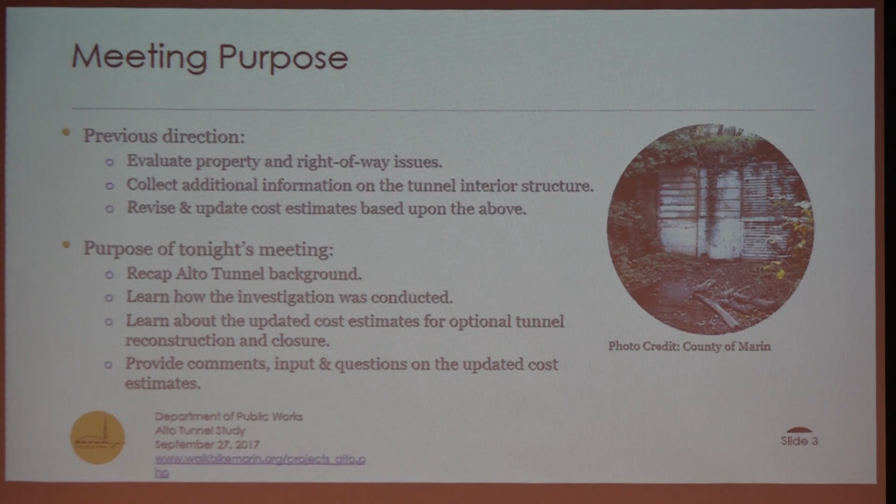So I just want to quickly go over what the previous direction was to study. After the Mill Valley to Corte Madera study, we had some questions that came out of that about the Alto tunnel corridor. We wanted to further evaluate the property and rights-of-way issues. We weren't quite certain about what those were, so we wanted to further study those, and then also to investigate the interior condition of the tunnel, because we hadn't been in there in a long time. We thought that those 2 things might affect the cost estimates that were identified in the Mill Valley to Corte Madera corridor study.

So that's the purpose of tonight, to review those final cost estimate updates based on that new information that we've just learned over the last several years, and make sure that we got it right.

So I want to introduce Victoria Eisen. She's going to come up and do a brief talk about what tonight's meeting is really about and what our question and answer session is going to be like.

Okay, so one more historic question. How many of you were at the meeting that we had in January that kicked off this whole study?

Okay, so a lot of you know how we did it last time. It seemed to work really well, so we're going to do it again. But first, I just want to clarify, like we did last time, that the Alto tunnel study is an investigation of the inside of the tunnel, like Carrie said, and its physical condition. It's not a pathway feasibility study. So tonight, we're going to report on what we found inside the tunnel and how it affects the cost estimates for doing various things with the tunnel, but we're not discussing the pathway and whether or not we're going to do a pathway. That's a decision to be made with the information that came out of this study.

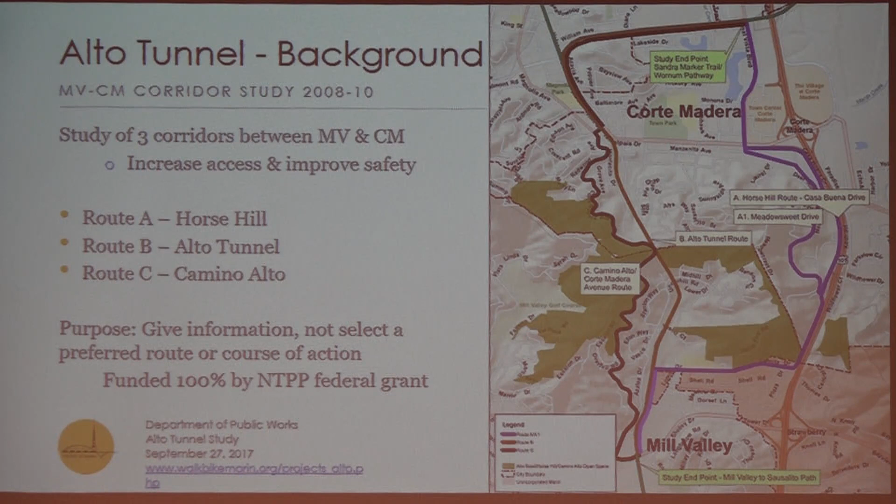This is just a recap, letting you know about the corridor study, which took a look at 3 separate corridors between Mill Valley and Corte Madera. The purpose of that corridor study was to evaluate and give information about those 3 corridors, not to compare them with each other, or to select a preferred route or course of action, but to provide information on possible improvements along those corridors. That study, along with this one, as Craig mentioned earlier, was 100% funded by non-motorized transportation pilot program funds.

This just gives you a little bit of facts about the Alto tunnel. It's just over 2,100 feet long, 16 feet wide. The cost estimates in the 2010 study identified for the tunnel segment only, 40 to 50 million, and for the entire route, about 48 to 60 million for all of the improvements combined. That compares to the Cal Park Tunnel between San Rafael and Larkspur, which is 1,100 feet long.

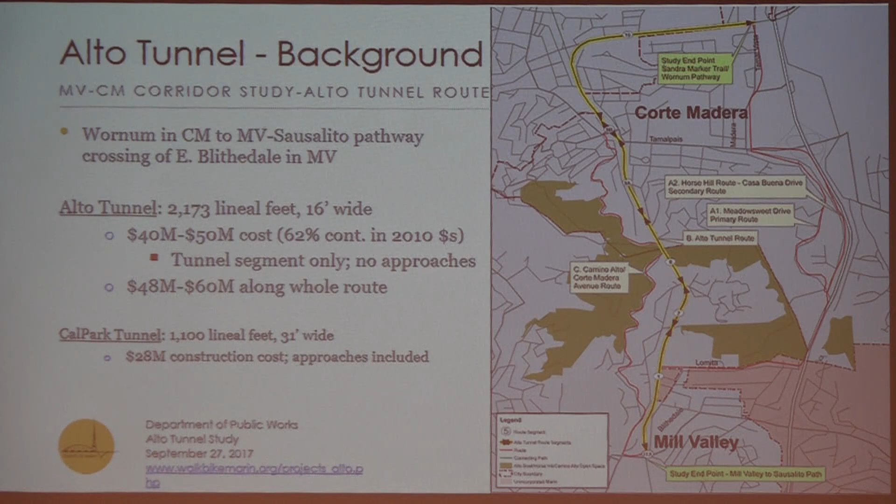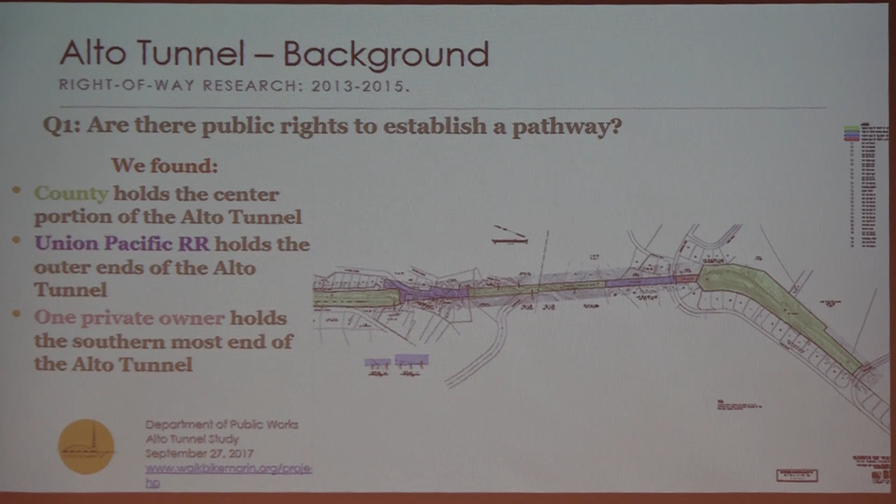Back in November 2015, we reported out to the community on our research about the right-of-way rights, about whether or not we had the rights to establish a public pathway. We found that the county holds the center, Union Pacific still holds the outer sides of the tunnel, and then there is one private owner on the southern end. So with that information, we used it to update our cost estimates for right-of-way acquisition.

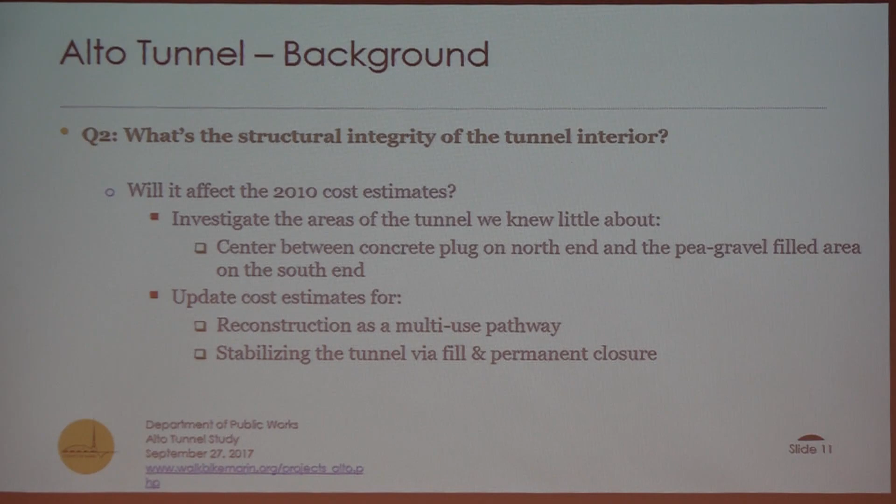So now we're going to get into the meat and potatoes of tonight's presentation, going on into answering the question about what the structural integrity of the tunnel interior is and whether or not it affected the 2010 cost estimates. We took a look in between the concrete plug on the north end of the tunnel and the pea gravel filled area on the south end, because we haven't been in that section of the tunnel in a really long time. There are other sections of the tunnel that we knew a little bit about, but that center section is the area we didn't know really anything about. So that's what we really needed to know in order to update those cost estimates, either for reconstruction as a pathway or for stabilizing and closing the tunnel, if at some point in the future that decision became necessary.

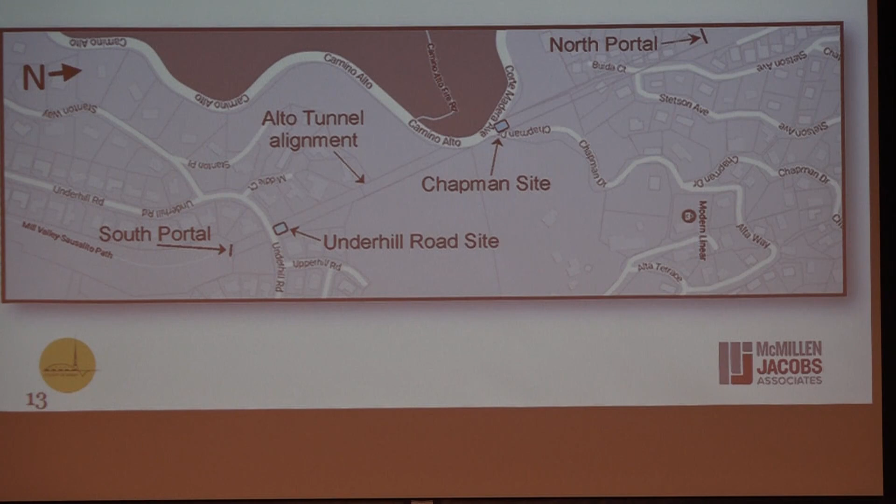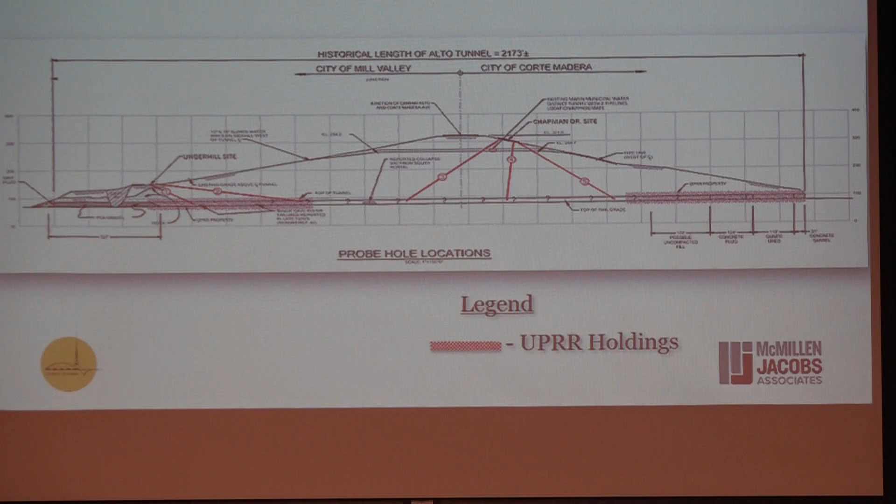We've talked about the south end of the tunnel. We had a collapse, now filled in with pea gravel, that occurred back in, I believe, 1981. This is the north end of the tunnel. We actually have a section here that's backfilled with a low-strength concrete material, 125 feet long.

So it's the interior of this tunnel that is currently inaccessible to manned entry. The purpose of this study was to investigate the interior of the tunnel.

What we did was, from the ground surface, we drilled 5 holes, 5-inch diameter, steel-cased holes, to intercept the tunnel. Once those holes were completed, we had a specialty subcontractor come out who performed laser scanning.

This was completed with a probe that we lowered down into the tunnel. It has an articulated head at the end of the probe, and it spins around as it shoots out a laser, and it pings back a response for a distance.

And it produces essentially a 3-dimensional point cloud that we can then gather the data from and produce a 3-dimensional image.

Other things to note here in the pink, this is UPRR property or holdings, and we have UPRR here at the north end as well.

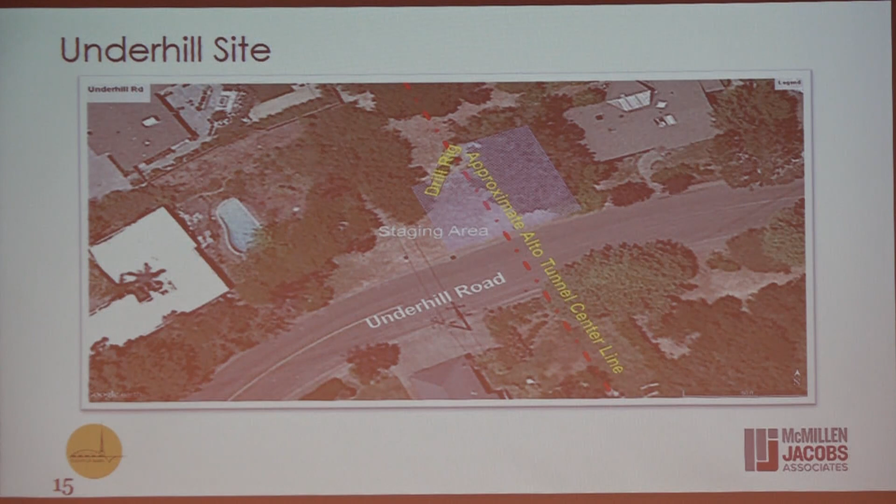This is the Underhill Road site at the south portal. This just shows where our drilling operation was staged.

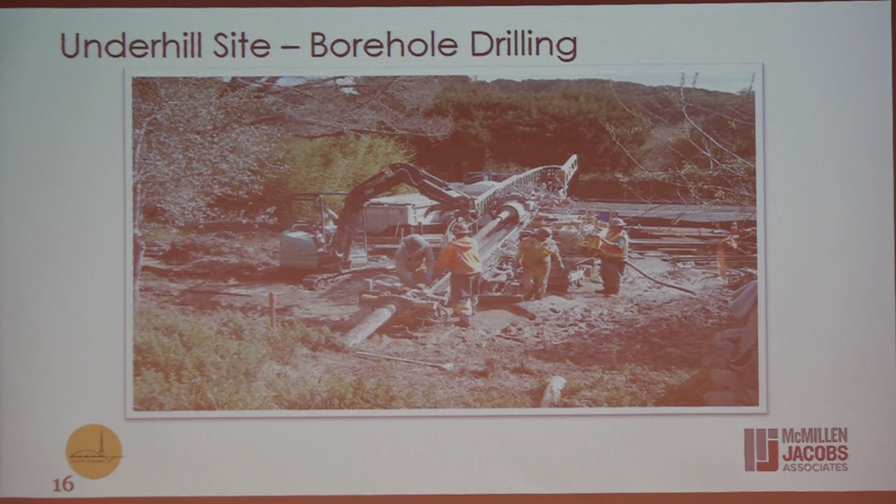This is a typical drilling operation. Recall this work took place during February and March. It was pretty rainy. We did a really good job of isolating the site and limiting erosion. This is the site when we were completed with drilling.

We actually covered each borehole location with an access box so we could come in later and do our scanning.

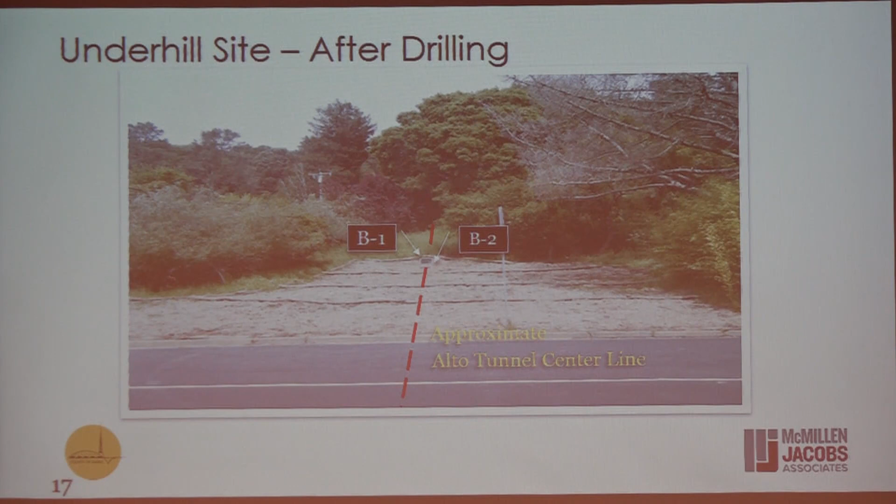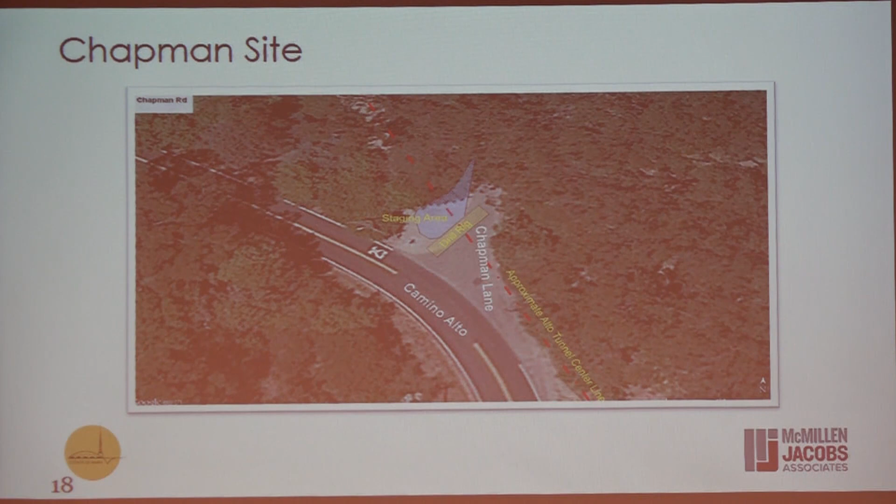This is the Chapman site. The tunnel is shown here in red coming through here. This site is right at the very top of Camino Alto. We actually took Chapman Lane for about 2 or 3 weeks as we drilled down. We had 3 locations that we drilled from here.

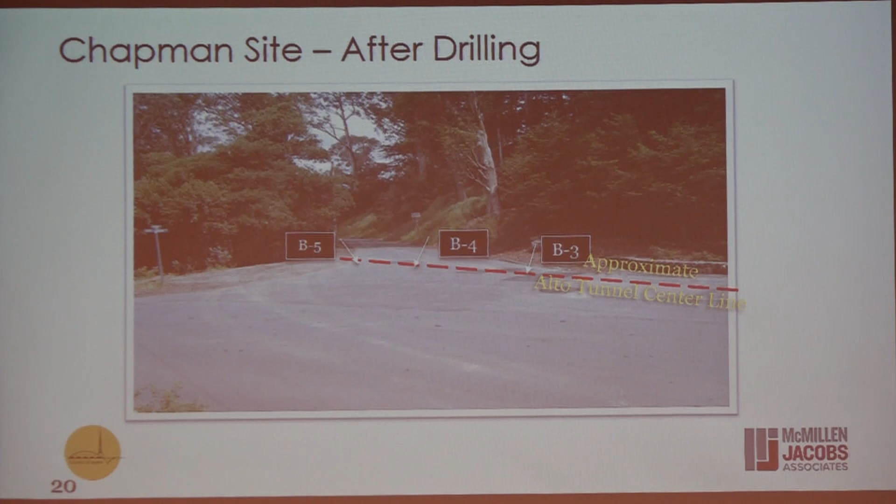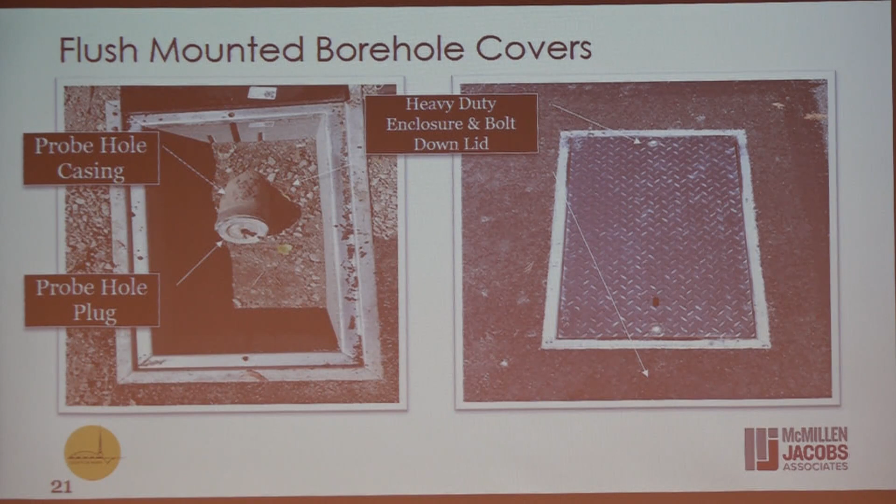This is one of the traffic rated boxes. This is what's inside the box, the steel casing and a cover on each casing.

Okay, so I'm going to quickly give you guys an overview of what we found first, and then I'll get into the details of what we actually saw in the slides to come.

But to summarize, boring B1, we hit collapsed material. Boring B2, we also hit collapsed material. Boring B3, collapsed material. Boring B4 was open, not collapsed.

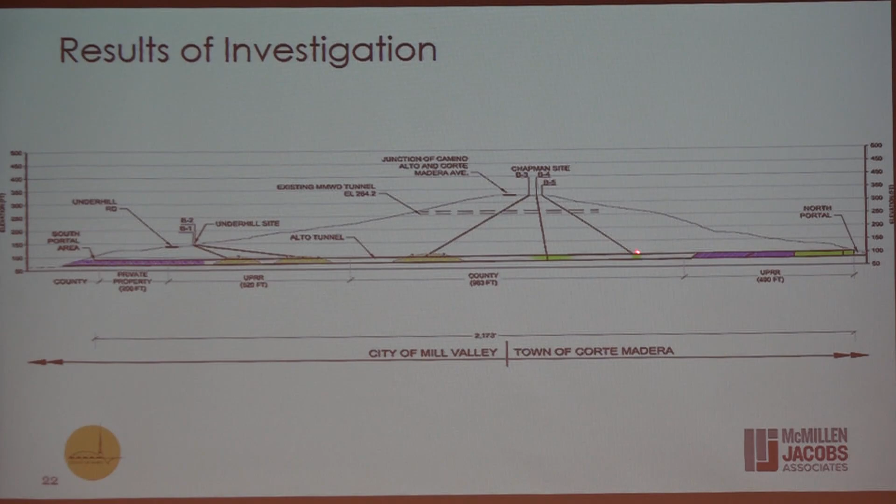Boring B5 was a little bit hard to determine what it was. I'll get to that later, but we found that it was open, not collapsed.

So to get into it, this is our first boring that we saw. After we completed the drilling of each boring, we sent down a GoPro video just so we could get an image of what we had inside the tunnel. When we were drilling, we weren't quite sure what we found.

We knew we were in the tunnel. The drilling operation uses air to push cuttings back up. We lost air circulation, meaning we'd hit a void. We definitely hit something different. This is what we found when we lowered the GoPro in.

The boring was where it needed to be, but we encountered rubble. For reference, this is 5 inches thick. This hole that you see here, that's actually where we advanced the drilling and the casing as far as we could.

We then retracted the casing a little bit to get this video. So that's the 5-inch casing hole that you see right there. It was collapsed rock. We found no void, and so we could not scan at this location.

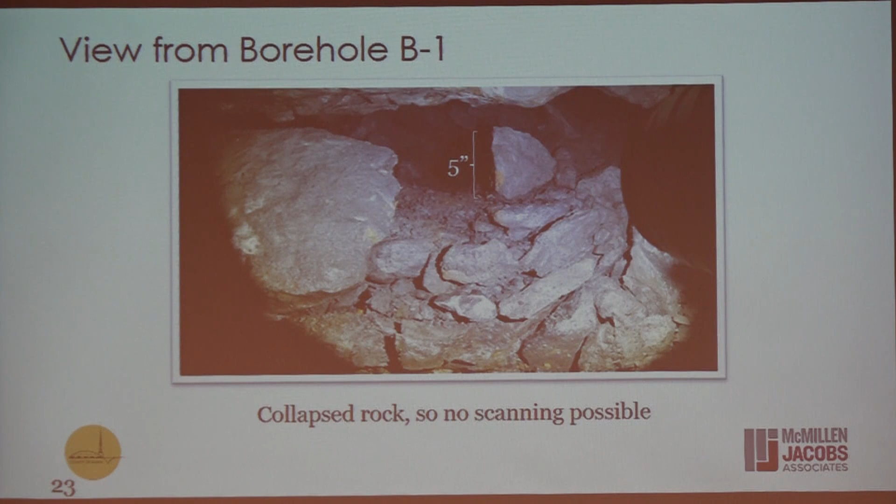Again, B2, kind of the same deal, although we couldn't advance the casing. So this is the steel casing that you see here. Again, rubble material that we terminated into.

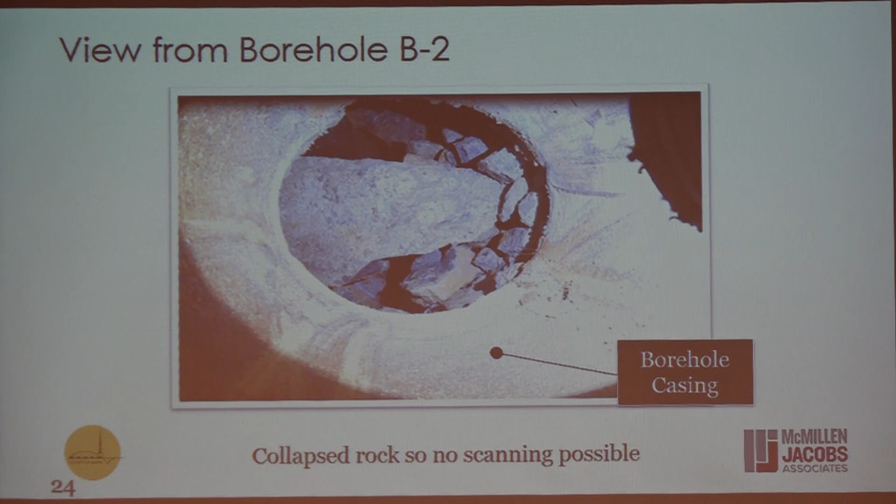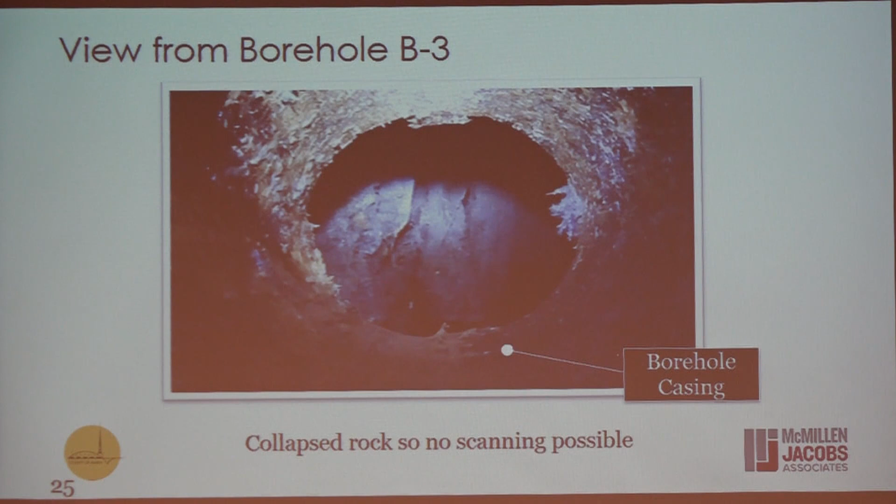Boring B3, again, here's our steel casing. It's a little bit hard to see, but this is rubble material directly in front of the casing. Again, scanning was not possible in this boring.

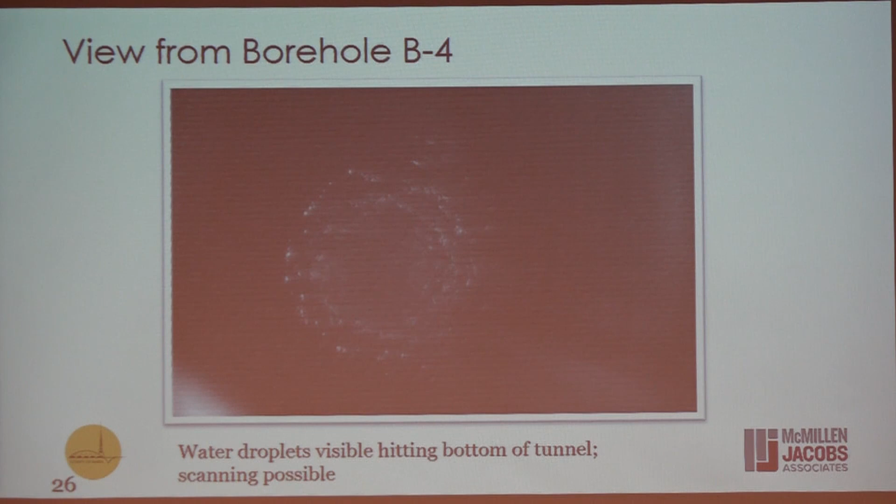Finally, B4, where we did encounter some open tunnel. This is a still image from the GoPro video. All we could see here was water droplets, so we knew there was some water in the floor of the tunnel, and we would have to wait for our scan to actually determine what the tunnel looked like at that location.

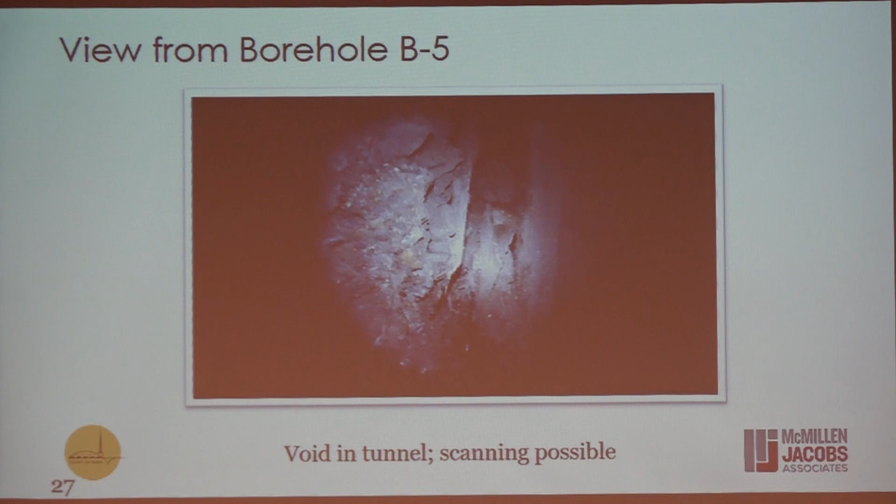And the view from boring B5, it was a little bit hard for us to determine just what it looked like, only based on the GoPro video, but we could actually see this is a wooden support. Here's more wood supports here. We weren't quite sure what we had until we lowered the scanning instrument down.

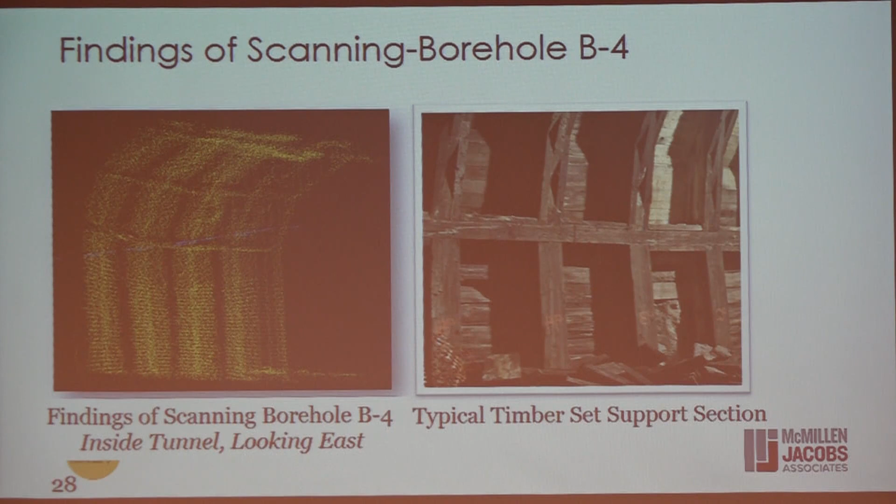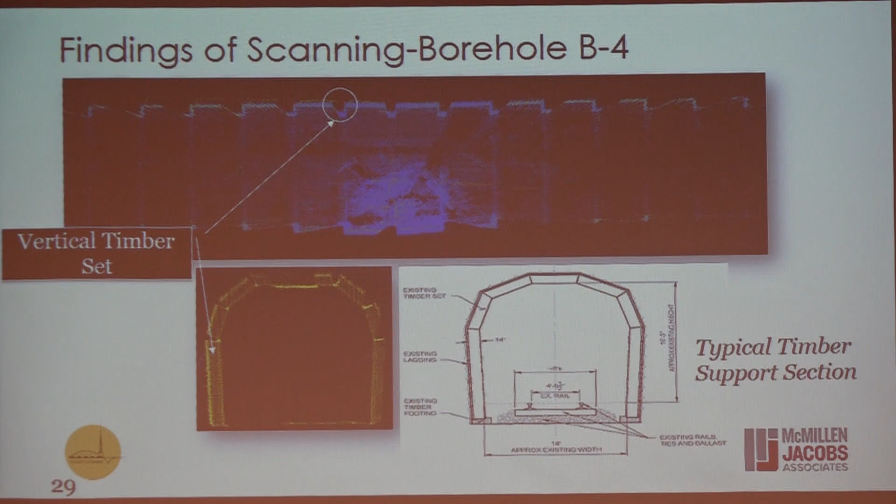So the probe, from the inside of the tunnel, is producing a 3-dimensional point cloud. This is a view of the scan looking above the tunnel, looking down. What you see, each one of these notches is an individual timber set that we see here. So basically, each timber set is producing a shadow, and a shadow is cast. The further out you see, the shadow is kind of casting this diagonal line of the scan.

What we see here is a view of, I want to say about 80 feet that we're showing here. We actually could see from this scan approximately 150 feet. 200 is the outer reaches of what we could see. At 150 feet, we could actually see sets, and we could determine that the tunnel was in fact open through the scanned area.

This is our interpretation of what we were able to measure from the scan, because it's kind of georeferenced, and we can actually get dimensions from the scan. And this actually was in line with what we expected. We had some as-built drawings of what the tunnel looked like, so this was in line with what we expected. The surface that we're able to see from the scan here, that's actually the water surface. And then based on the anticipated height here, we were able to determine that there's about 2 to 3 feet of water at this location in the tunnel.

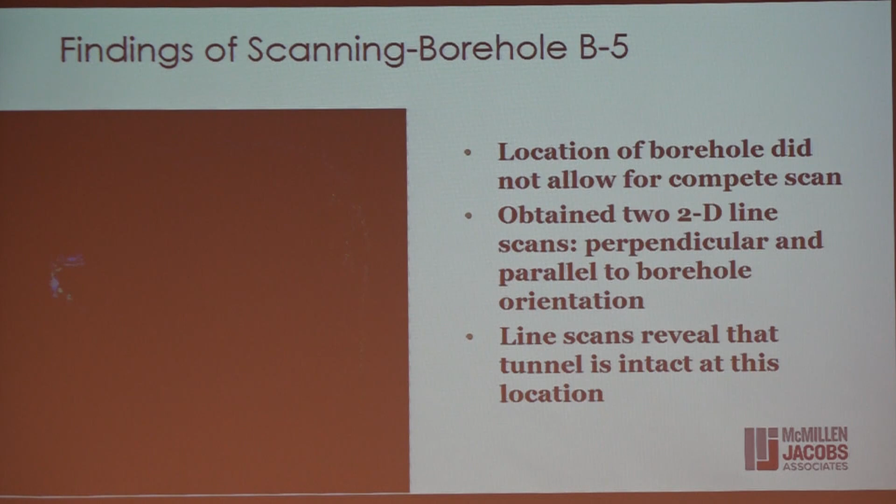Okay, so I want to get into what this all meant for us and how we interpret this data for our cost estimate and for our design.

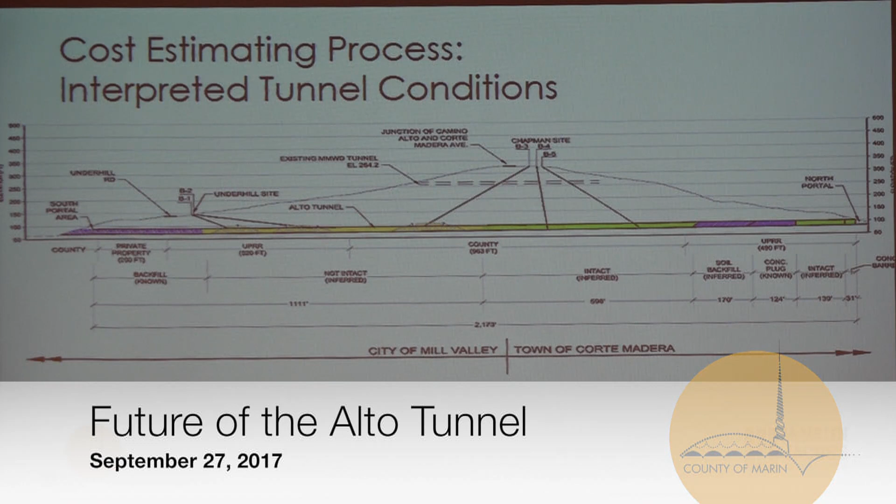So starting at the south end, we know that the first 3 out of 3 borings encountered collapsed zones. We also know that the south end is also the end that had experienced some collapses in the past.

There were reports of minor collapses in this area, and another collapse in this area. So it wasn't totally unexpected that we'd find some collapses here. We also had the original construction records from this tunnel, and we know they installed heavier supports in this area as they were excavating, which indicates the ground was lower quality there. So past experience, more timber sets in this area, plus the fact that we encountered 3 out of 3 borings in a collapsed zone. For the purposes of our investigation, we've assumed that this entire area is collapsed.

These two borings encountered unobstructed views of the tunnel. They were not collapsed. We also have no indication that there were prior collapses in this area, and the construction records show the support was not quite as heavy in the north half of the tunnel. So we've interpreted this portion of the tunnel to be intact.

We've also, based on comments we've had since producing our draft report, looked at a couple of ranges on what would happen if more is collapsed and less is collapsed. We'll get more into that later when we talk about the cost estimates.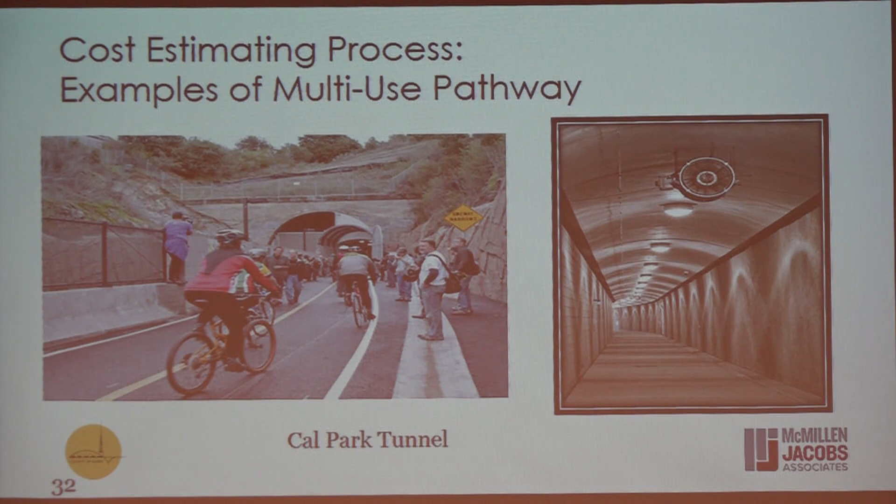And this is Cal Park, the multi-use portion of Cal Park. Recall that Cal Park is actually a much wider tunnel than Alto is, and it's split between rail on one half and pathway on the other half. That gets to be important for the design that we came up with for Alto.

So the pathway-only design at Alto would be a similar size to what was used at Cal Park—11 feet 4 inches wide at least, and about 15 feet high. For Alto, our cost estimate assumed that the entire tunnel from one end to the other, portal to portal, is upgraded and improved with steel sets and shotcrete.

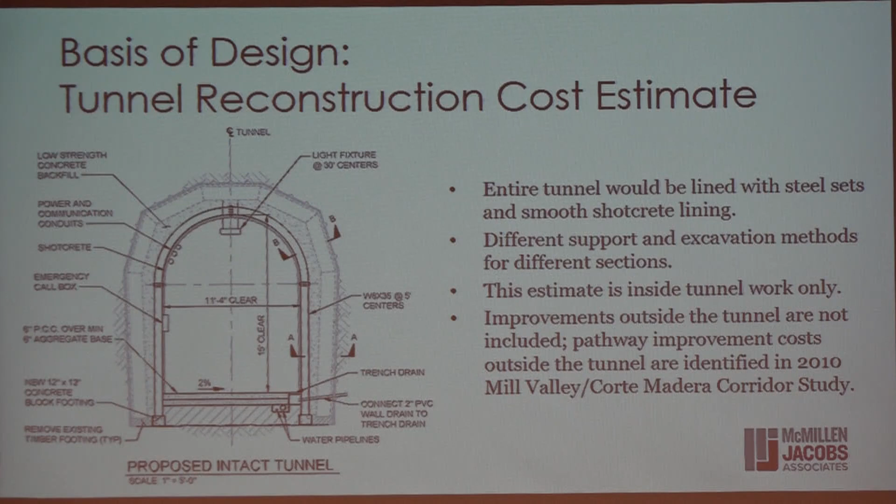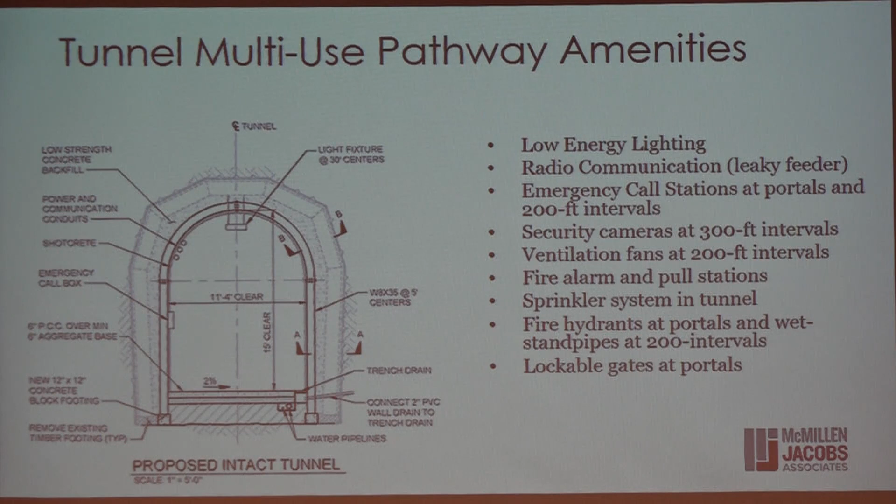Our estimate was for the tunnel work only; it did not include pathway upgrades leading up to the tunnel. The amenities we assumed for Alto, similar to Cal Park, include lighting, radio communication, emergency call stations, ventilation, etc. We've just assumed the same at Alto.

So we've come up with a couple of different support schemes for Alto, depending on whether we're in the concrete plug section, the open tunnel section, or the collapsed sections.

That's what's shown here. This right here is the steel sets, and though you can't really see it, we would apply shotcrete all the way around. One of the important things we were able to do for Alto was recognize that the Alto tunnel is bigger than we need it to be.

If we're only shooting for the same size as Cal Park, we can actually fit the new steel sets inside of the existing timber sets. That's important because the alternative—the typical way of doing this if you need to maintain your tunnel size—is to rip out each timber set, hope nothing falls in on you, stabilize it, and then install your steel sets. So this is a cost and time savings, at least for the portion of the tunnel that's intact. We're not able to do this with half the tunnel that's not intact.

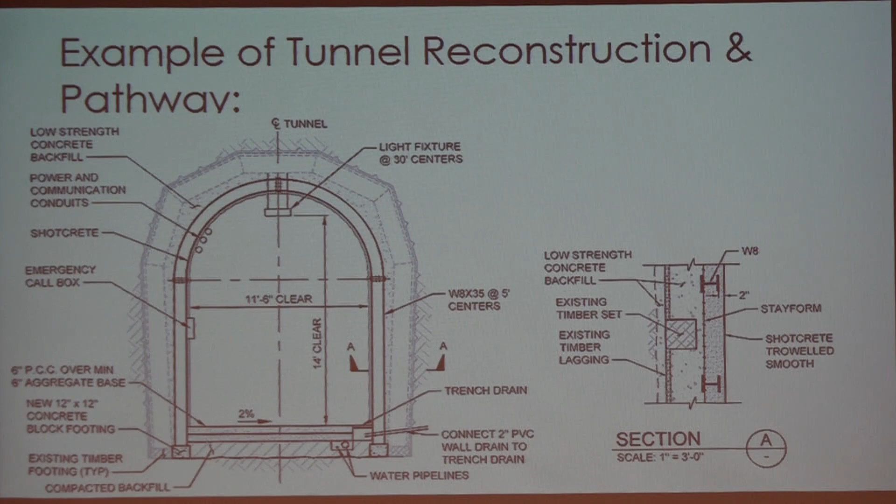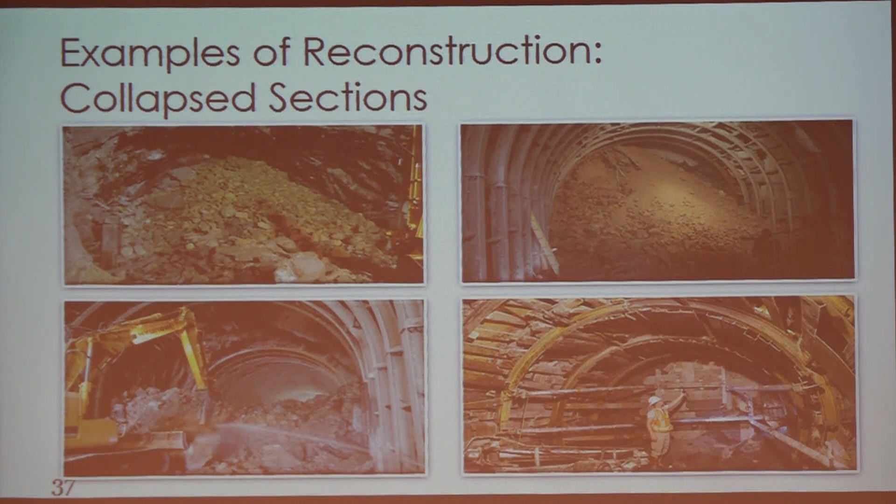For the half of the tunnel that is not intact, we would not be able to perform that same support scenario. So in that case, sometimes we do what's called breastboarding, where you stabilize the face ahead of you and take a little piece at a time. There's also something called spiling, where you shove a structural member out in advance of your tunnel face. It basically forms an umbrella around you.

Okay, and that's it for the tunnel reconstruction. We also looked at updating our original costs for filling up the tunnel and for a complete abandonment.

So the concept is pretty simple for filling up the tunnel. You fill it up with a stable material. The execution of that is a little bit more difficult. What we would propose to do, if that were selected, would be to use the existing

probe holes that we've already drilled as a means to fill up the tunnel. The intact sections could be filled with what we called controlled low-strength material. It's basically like a low-strength concrete, and that would be adequate for filling up the open sections here.

The sections where we have existing collapses, that low-strength material is a little bit too viscous to permeate into there. So there we would have to use a lower viscosity grout, basically just cement and water, to fill in that area.

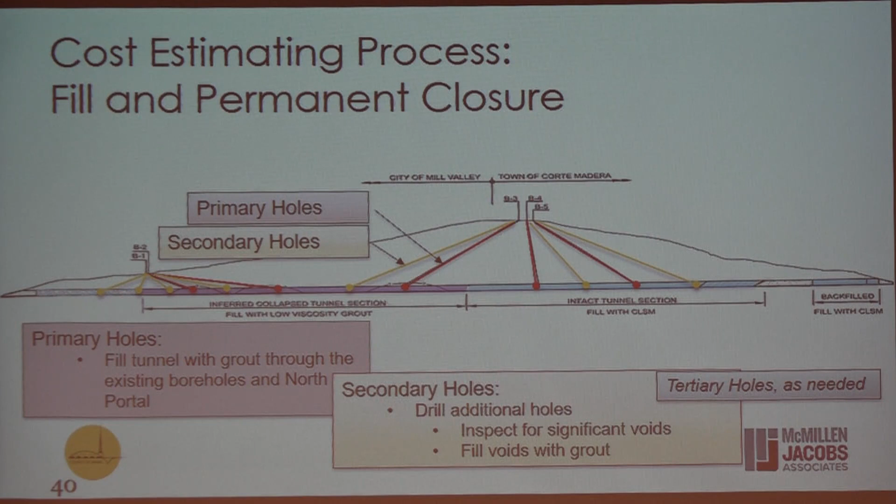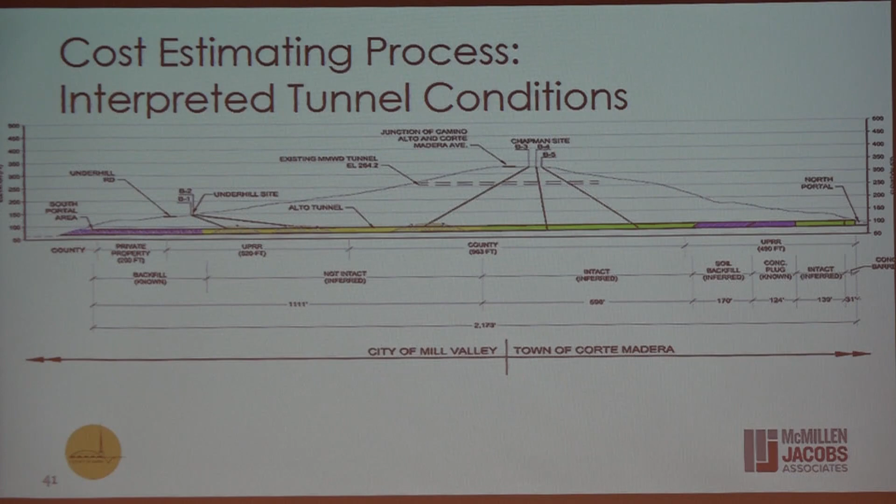And this is it. Back in 2010, the total cost was around 40 to 60 million, and that was just for the tunnel costs. We've actually escalated those up to 2017 values for comparison purposes, and you'll find that the base construction cost escalated from our 2010 study was between 20 and 25 million.

Our new base cost is actually a little bit higher—between 22 and 26 million. But back in 2010, our contingency was around 62%. The reason that contingency was so high back then was because it was not a site-specific study. We had no engineering analysis back in 2010. That estimate was based purely on the contractor's bids we received for the Cal Park tunnel, so we simply applied Cal Park numbers to Alto tunnel. There's a lot of risk involved with that, so that's consistent with the high contingency we see there.

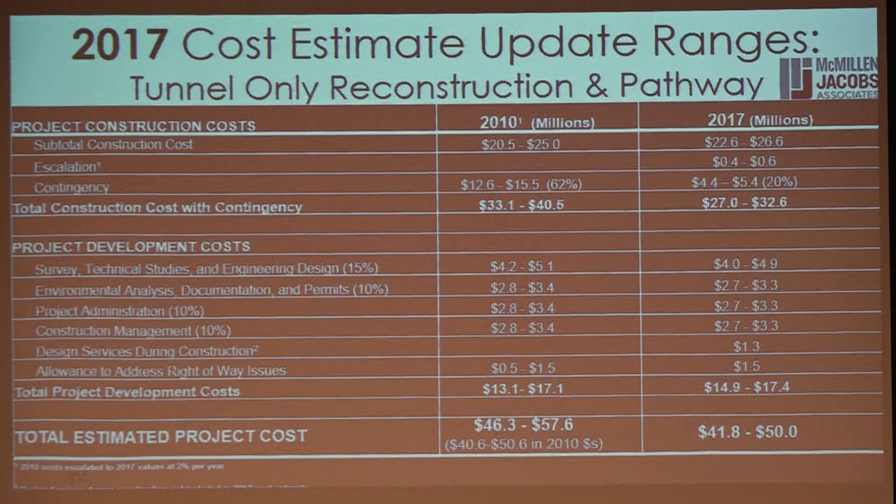Moving on now to the complete backfill. This one, the 2010 estimate, escalated to 2017 dollars, is about 13.2 million, and that compares to about $8.5 million for our current cost estimate.

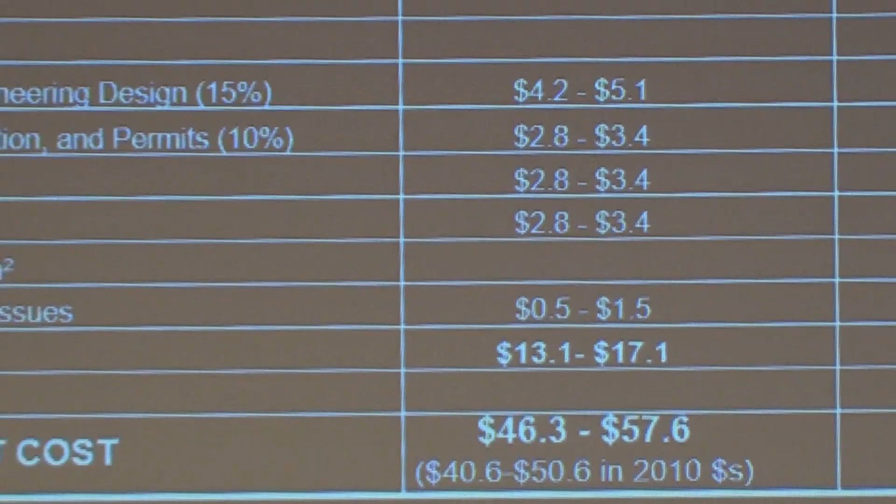How did you know about the collapsed sections in the tunnel? Besides taking a scan, were collapses monitored in the past, and how? And who monitored these collapses?

There were reports before the south end of the tunnel collapsed and was sealed up, of people going in and seeing some more minor collapses. That's all we had reported prior to this study. That, in conjunction with our scan and our boreholes hitting collapse zones, is what we used to interpret those areas as collapsed.

Tunnel opponents have claimed that construction will release cement, concrete, creosote-soaked railroad ties, and other substances known to be harmful to human health, including lung, stomach, and colon cancer, skin infections, kidney disease, vision impairment, asthma, COPD from breathing toxic substances, and particulates lodged in their lungs. Agree or disagree?

The question says tunnel opponents have claimed construction will release these things. I don't know if they have actually claimed that, so I can't agree or disagree as to whether those things would happen. This is a conceptual study; we'd have to do more studies. But like I said before, our specifications are written such that these risks are usually kept at bay. That's all I can say, and that's all I have.

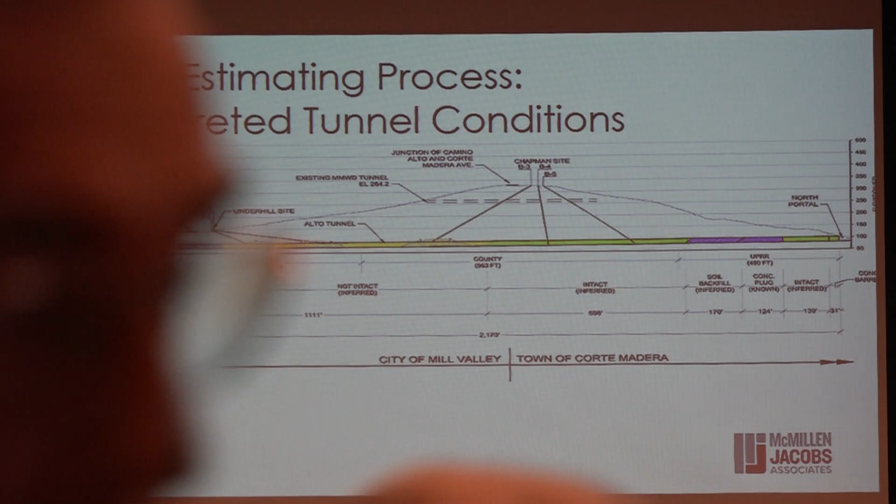Why did you not investigate the part of the tunnel under the Corte Madera homes? As I mentioned before, we looked at the center of the tunnel between the concrete plug and the collapsed and filled section on the southern end. We did not look under the southernmost or northernmost sections because we have fairly recent documents showing this was stabilized with concrete, so we were relying on that information in those reports.

The other reason we didn't go in there is that our access points into the tunnel from public right-of-ways are very, very limited. We were able to access it from the public right-of-way at the top of Camino Alto at the Chapman site, and then at the Underhill site, boring down into the tunnel. We weren't able to identify an appropriate location on this side that would give us much more different information than we already knew about this section of the tunnel.

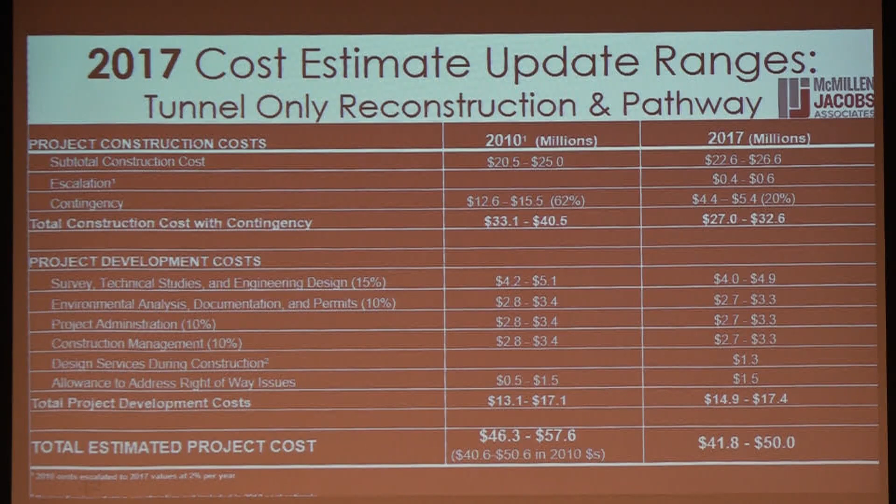This question is, any possibility for the railroad to pay for any of the cost? Well, we don't know that yet. The county holds the center section of the tunnel, then Union Pacific holds these outer ends of the tunnel, and then there's a private property owner who holds whatever rights the railroad held. So we don't know if the Union Pacific Railroad would want to share in the cost of either reconstructing or filling or doing anything in the tunnel.

This question is, will the county consider a GO bond, a general obligation bond, to finance the tunnel based on the study? What bond authorization would be requested? There's been no discussion of a bond. We're not sure about that.

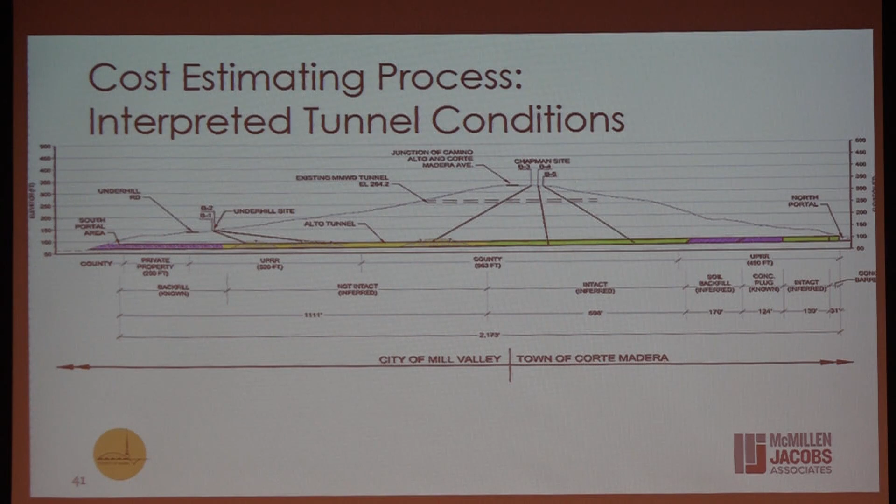Please identify what government funds would go to other communities if we don't use them. At this point, this funding source that we've used to do this study is completed at the end of this study. We would not be losing any funds to complete this study. If you're asking about bicycle and pedestrian funds and being competitive for applying for grant funds for a possible future project, I couldn't tell you how many different possible funding sources there are. There are many different bicycle and pedestrian and livable communities grant funds that your local agencies go after to make improvements in your communities.

How would this be funded if there is a decision to initiate the project? What would the cost be to Mill Valley, Corte Madera, or the county for the project, and for ongoing maintenance? This person says, I do not want our schools, roads, or public safety to suffer.

As I explained earlier, there are lots of different kinds of grant funds that we've been successful in applying for. So if a decision was made to initiate a project, that local agency would start applying for those kinds of funds. What the cost would be to Mill Valley, Corte Madera, and the county is undetermined at this point. That would be up to each of those local agencies, the policymakers, to determine what an acceptable level of funding is to them.

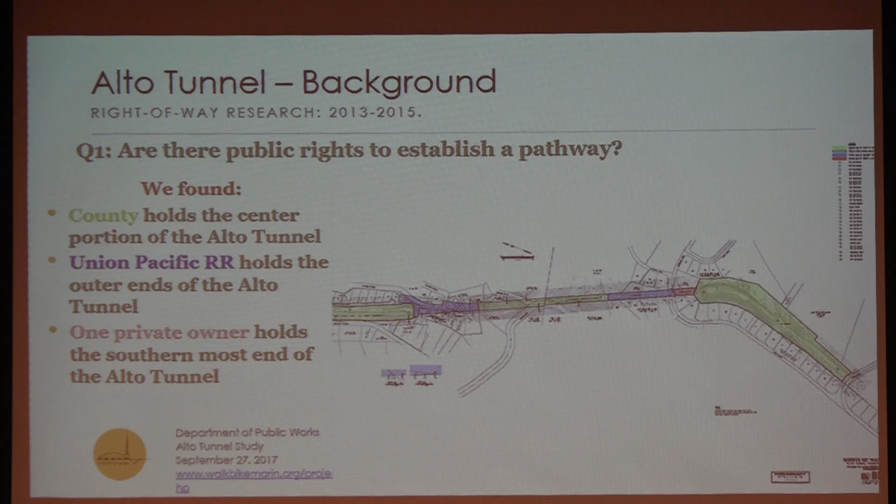So we've answered seismic information. How long would construction take? We answered that. What are the elevation differences from north to south? I don't recall. It's not a great difference, a couple feet.

How would you ventilate the tunnel? So Cal Park has ventilation. A tunnel of this length really doesn't need forced air ventilation during normal operations, but ventilation is often put in these tunnels for emergency situations, fire, mostly fire.

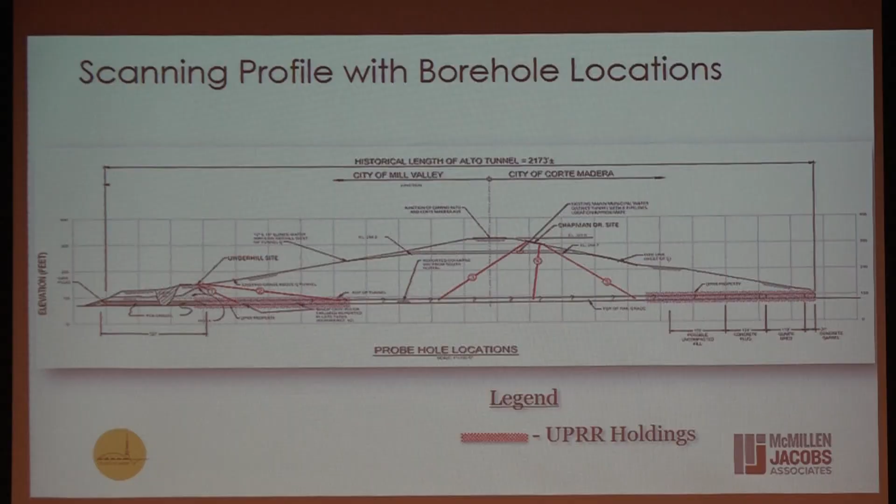What drainage issues do you anticipate? There's a drainage system. Cal Park has a drainage system in the tunnel. That drainage is collected and conveyed out of the tunnel, and it would flow into probably a storm drain. And I think the rest were for you.

What would be the hours it would be open? That's yet to be determined, but as we're looking at Cal Park, I believe the hours are 11 to 6, or 11 to 5.

Are toilet facilities being considered? At this point, that's a detail that would need to come later on. And how and who would provide policing services? It would likely be your local policing services, and if not, it could be the sheriff's department, but that is, again, another detail that needs to be worked out.